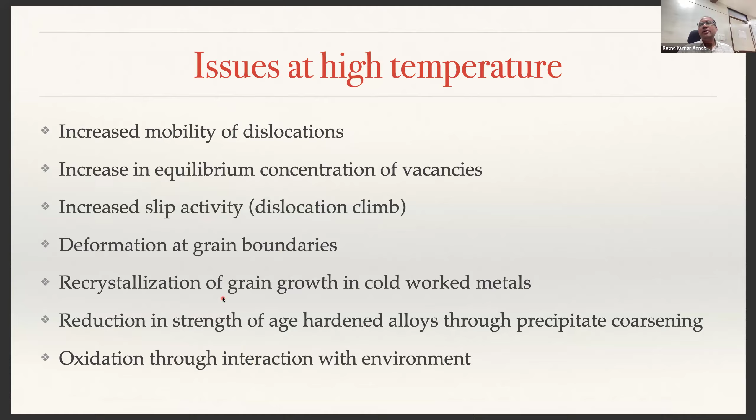And oxidation, because at high temperature, oxidation will be promoted much more easily. So these are all detrimental effects that you don't want in materials when they are operating at high temperature. That is the reason why you need to understand the behavior of these systems at high temperature.

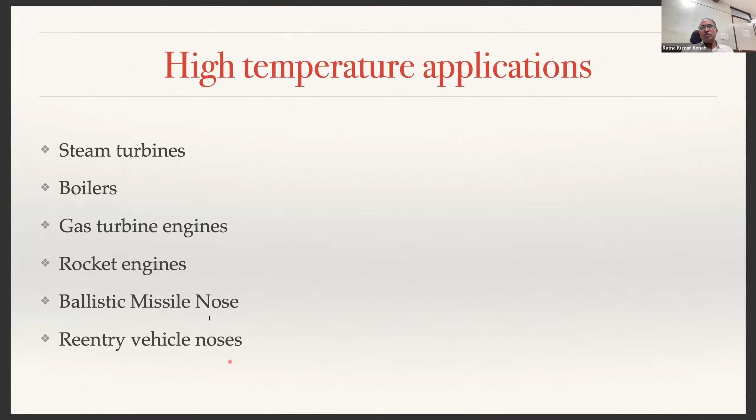There are various engineering applications where this high temperature phenomena is very important. Steam turbines operate at close to 500 degrees Celsius and so on, and hence you need to be very careful with the design of the turbine components. Boilers, gas turbine engines, rocket engines, ballistic missile noses, which are usually subjected to very high temperature, re-entry vehicle noses, which are also subjected to very high temperature.

So usually the high temperature strength. When you measure the strength of a material, when you mention this is the ultimate tensile strength of the material, we do not talk about temperature. Usually that is mentioned at room temperature. But when you increase the temperature and do the test, the ultimate tensile strength will be lower, it will be reduced. So the high temperature strength of materials is usually assessed with respect to a time scale.

What do I mean by that? I will tell you in a couple of slides from now. The tensile properties, if you measure at room temperature, are independent of time, but high temperature strength will be a function of time. That means at that particular strain, if you are operating for a sufficiently long time, the load at which it can withstand at that particular strain will come down. So that is very important. That is what we call relaxation of the material.

Again, at high temperatures, the strength of the material depends on the strain rate and time of exposure. The material strength depends on the rate at which you are loading more severely. And because we are dealing with metals, they exhibit elastic property normally at room temperature, but at high temperatures, several metals exhibit viscoelastic response, very similar to polymers.

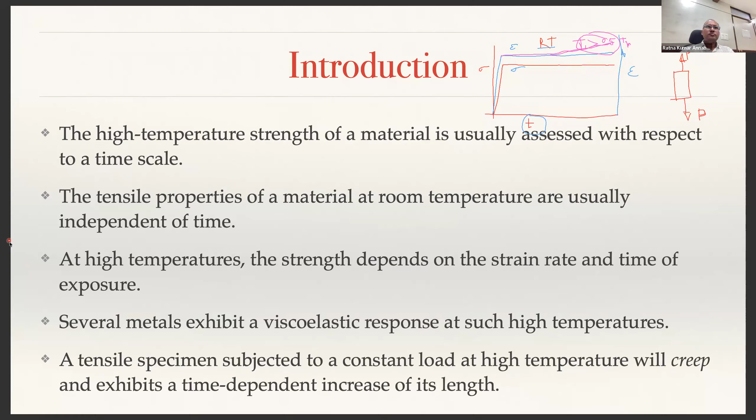Sir, one small question. If you remove the load, then what happens? Will it come back? I will talk about it in a moment.

So I said when it is working at high temperature, this happens. At room temperature, the strain will not increase, but at high temperature, the system continues to deform.

But what do you mean by high temperature? How do we define this high temperature? Is it 100 degrees Celsius, 200, 300 degrees Celsius? What is this temperature? Because a high temperature for one material may not be sufficiently high for another material. So how do we define this high temperature? A particular temperature can be considered high for one material, while for another it is not.

So a common measure is what we call homologous temperature, TH. Homologous temperature is the ratio of the test temperature to the melting temperature. That means if you are operating at T and the melting temperature is Tm, T by Tm is your homologous temperature.

Creep in a material is significant to be worried about if your homologous temperature is greater than 0.5. That means if your operating temperature is about 50% of the melting point of that particular material, that is when you need to worry about creep deformation. Otherwise, you need not worry.

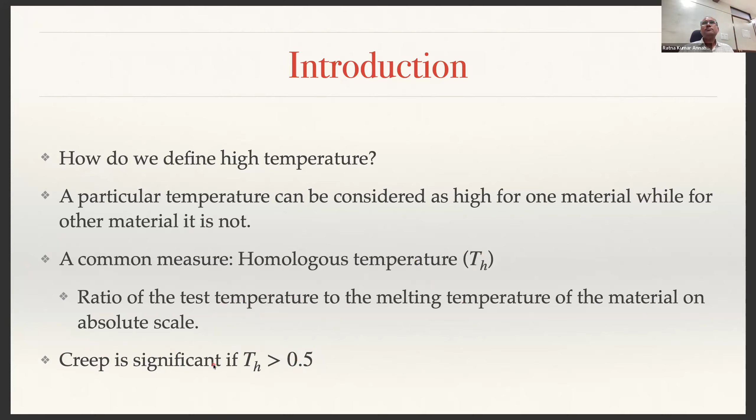Okay, now what kind of test do you need to do in order to see whether a material is good to be used under creep deformation or high temperature deformation? So the type of high temperature test that you want to use for a given material is usually determined by the time scale of its service for the said application.

For example, if you are designing a component for a rocket engine, we know for sure rocket engines are subjected to very high temperatures. Yes or no? Yes, sir. But then, do I need to design the component for creep? Just because it is subjected to very high temperature, do I need to design it for creep?

What about gas turbine engines, is it creep? Based on operating temperature only we have to decide. Based on operating temperature, is the operating temperature going to be very close to the melting temperature? It is going to be more than 0.5 times the melting temperature. Not the rocket engine, but gas turbine engines do go for thermal creep. The rocket engine need not be designed for creep, because the amount of time it operates at that high temperature is very short-lived.

So that is why the kind of test required to decide whether this component is suited for creep application depends on the time scales of its service. For example, you can simply do a high temperature tension test, measuring the ultimate strength of the material to see whether it is going to break or not.

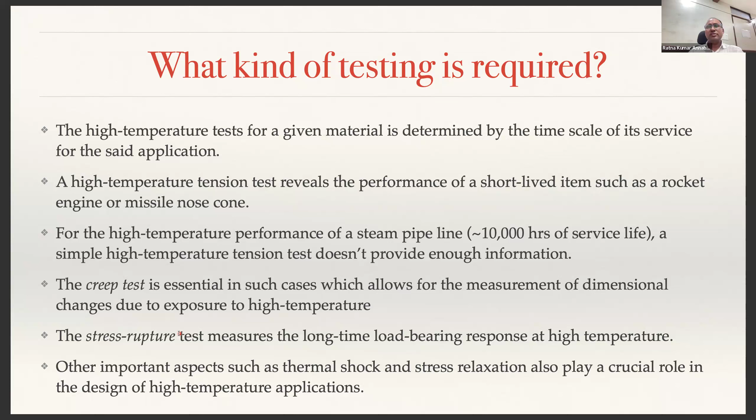There are also other aspects such as thermal shock and stress relaxation. They are also very important in high temperature applications.

This is a very interesting graph that gives us some understanding of creep deformation and how we do the test. Imagine you have a specimen subjected to a load sigma 1. At time t equal to 0, it is applied with a certain load, and at that load it deforms instantly. There is an instantaneous deformation of epsilon 1 at time t equal to 0.

You maintain that load without changing it. Because you are at high temperature, the material is going to deform, and hence strain develops. This is the instantaneous elastic deformation the material undergoes when the load is applied.

After that, you maintain the constant load, but because of the behavior called creep, the material keeps deforming. Thermal energy provided to the material enables dislocation motion, and as a result there is plastic deformation happening from epsilon 1 to epsilon 2. This is what we call anelastic deformation, occurring between T0 and T1.

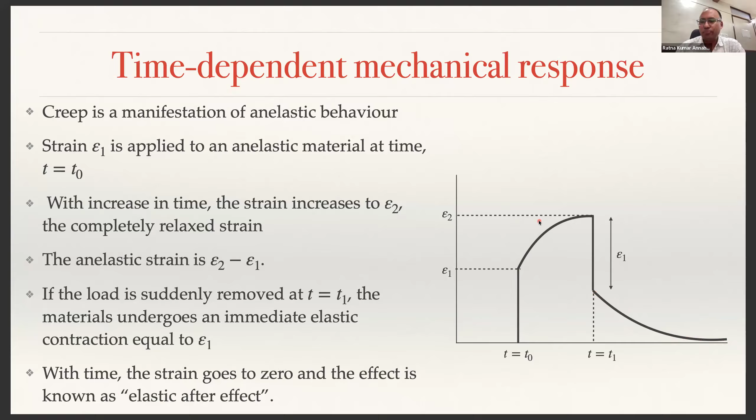Here we plot a curve called the creep curve, which is very similar to what we studied for crack length evolution.

Is this similar to the Paris law? Yes, you're right—similar in appearance to the Paris law, but it is not the Paris law.

Even in creep, you have three regimes: primary creep, secondary creep, and tertiary creep. Initially, when you apply a certain load, there is instantaneous elastic deformation defined by epsilon naught. After that, as you wait, creep strain develops. If you look at this region and take the slope of the line, it keeps changing.

After some time, you enter the secondary creep regime, where the strain rate remains constant—this is what we call the creep rate. Initially the creep rate is higher, then it slowly reduces and attains a steady value, which remains for quite some time; this is secondary creep. After that, you enter a regime where the creep rate starts increasing suddenly, and eventually the material fractures.

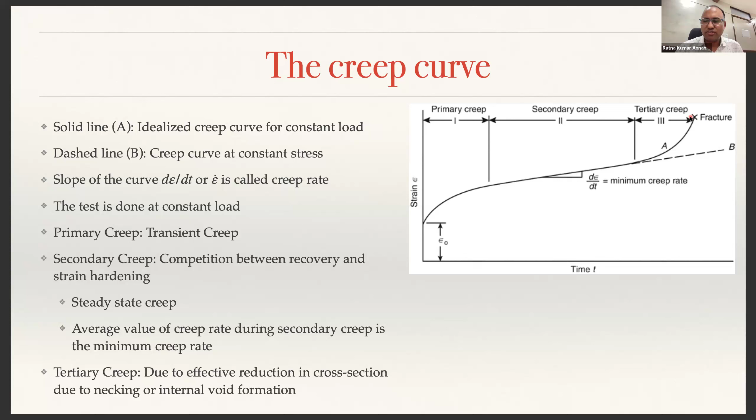One popular model for understanding creep failure is Andrade's model. This represents a constant stress creep curve, which is basically a superposition of two separate creep processes: an instantaneous initial rise, that is epsilon naught, followed by transient creep, or primary creep, with decreasing rate over time, and then a constant creep rate, which is called viscous creep.

All these things are embedded in this formula: epsilon naught e power kappa t. So epsilon naught is your initial elastic component, and based on that you define the initial primary creep, which is all transient, and then you have secondary creep. Beta and kappa are material constants depending on the material.

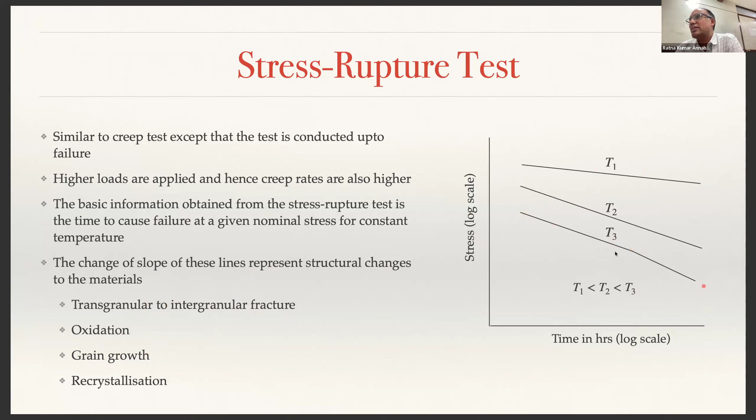The structural changes during creep can happen because of deformation by slip, subgrain formation, and grain boundary sliding. You can have slip, as discussed in plastic deformation, and you can also have subgrains forming within grains, and grain boundary sliding, because the grain boundaries become weak and may slide themselves. That is also one form of plastic deformation.

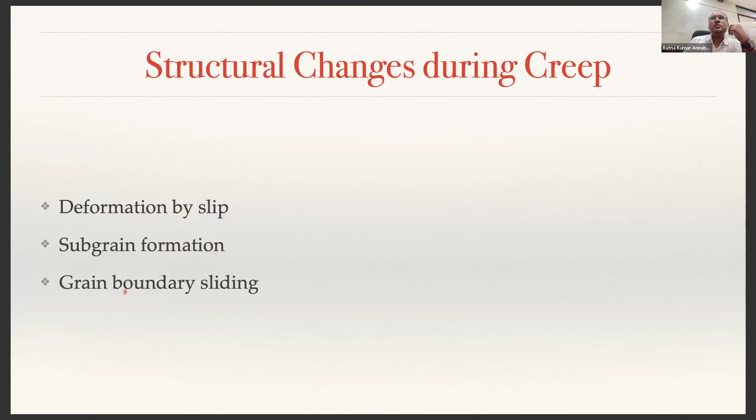This is how a typical creep testing machine looks like. Very simple, a fulcrum based test: you apply a constant load here, this is your specimen, and you put a strain gauge to measure the strain. For a constant load at a given temperature, you maintain this in a furnace so the entire specimen is at constant temperature. You will have instantaneous elastic plus plastic strain depending on the load applied, then primary creep, secondary creep, tertiary creep, and then rupture.

In the stress rupture test, we are measuring what is the time that it takes at a given load for the rupture to take place.

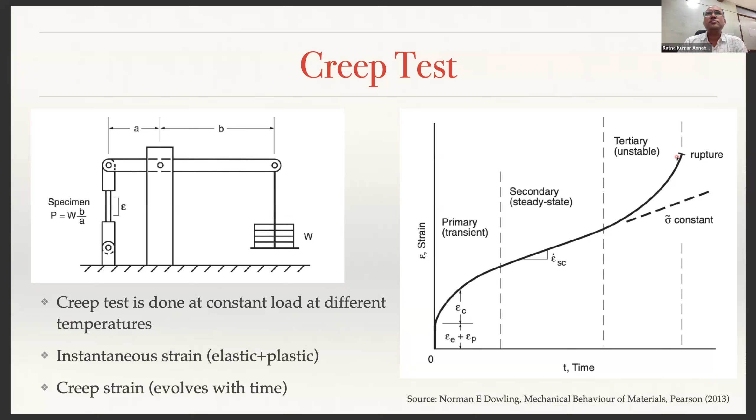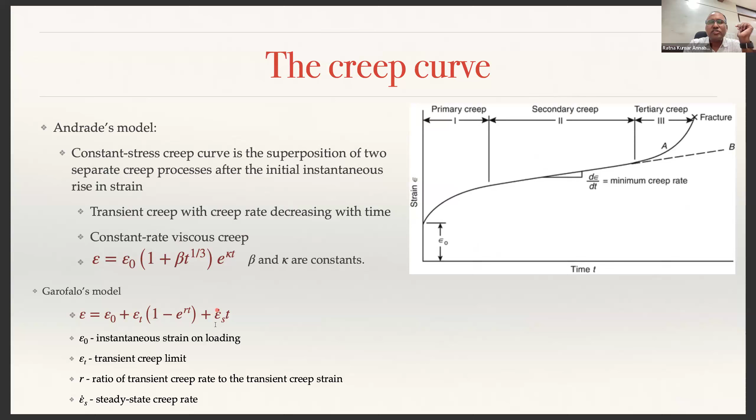The key data to be reported after a creep test is basically the stress sigma, temperature T, steady state creep strain epsilon SC dot, and time of rupture. These are the typical properties you need to put into the appropriate formula. For example, if you are using Garofalo's model, you need to know what is your epsilon S dot, which you measure from the creep test.

You can also get different plots to represent creep data. You have true stress versus true strain rate, SC dot, at a particular strain rate, which will be different for different temperatures. And here, sigma versus time to rupture: you can plot at a given stress and temperature what is the time to rupture. This is another way to represent the data. It's all one test, and you can represent several data from it.

So in fatigue, you write a stress versus stress-life diagram. In creep, you write a stress versus time-to-rupture diagram.

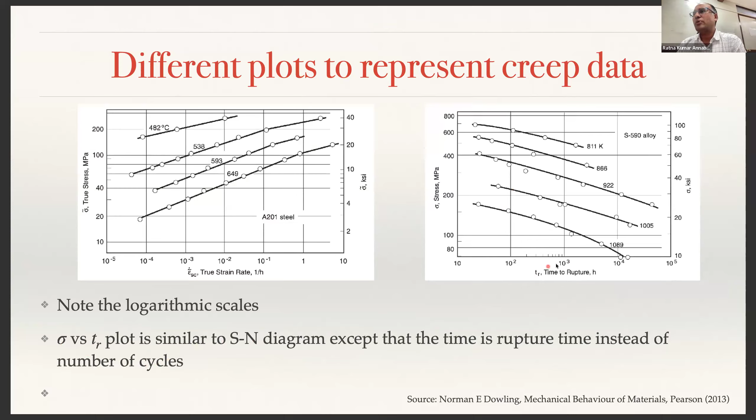This is typically how creep data looks like. As a function of homologous temperature, you can see up to 0.4 the effect of creep will not be significant, depending on the temperature and the load applied. Here you see tensile stress versus homologous temperature, showing the region of creep, with different mechanisms: transgranular creep fracture, intergranular creep fracture, and here it is rupture.

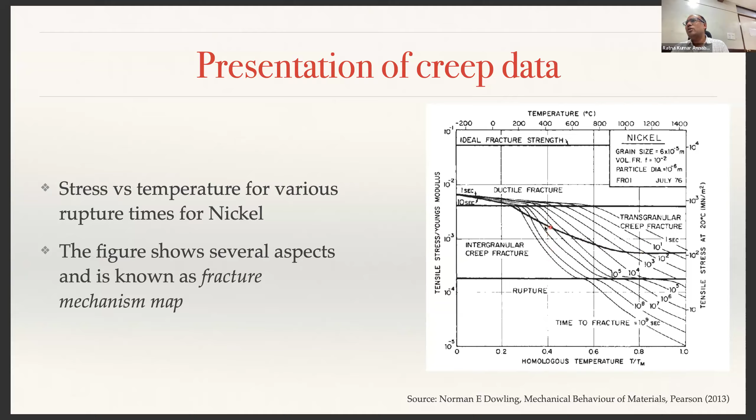This is typically what you would observe in creep data. Different fracture mechanisms: if you have a typical ductile fracture, say at T/Tm around 0.2, like room temperature, you will only see ductile fracture, you will not see this creep mechanism at all. The creep mechanism becomes more prominent below this line, typically at T/Tm close to 0.4 or so.

The creep data can be plotted as stress versus strain versus time for different sigma 1, sigma 2, sigma 3, and the same data can be represented in different ways. Stress-strain curves for various values of time—stress and strain at different time points—are called isochronous strain curves.

Using these isochronous stress-strain curves, we can measure the secant modulus, which is the slope at a given strain. For a given strain, you can draw a straight line, and the slope of that line is called ES, which can be plotted as a function of time. At a given time, the value of ES for different times will be given, and you can plot ES for that particular time, and so on.

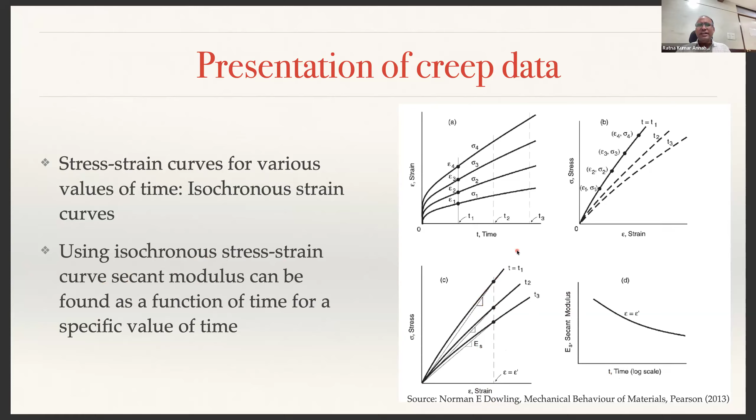As we have discussed, the physical mechanisms that cause creep will be different for different materials. It will not be the same. So in some materials, it could be transgranular creep fracture, and for some materials, it could be intergranular creep fracture. Intergranular means from one grain to another grain there will be a fracture. Transgranular means within the grain.

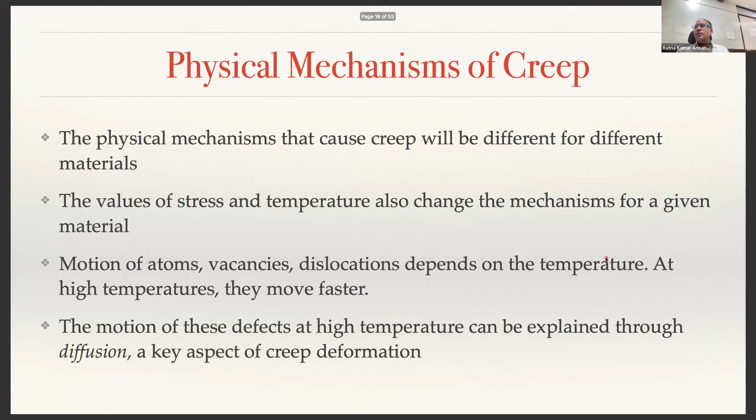Now, the strain rate we are talking about can be represented in this Arrhenius form, where Q is your activation energy, which we have actually measured here for each material. R is gas constant, T is the absolute temperature, and A depends on the stress that you are applying.

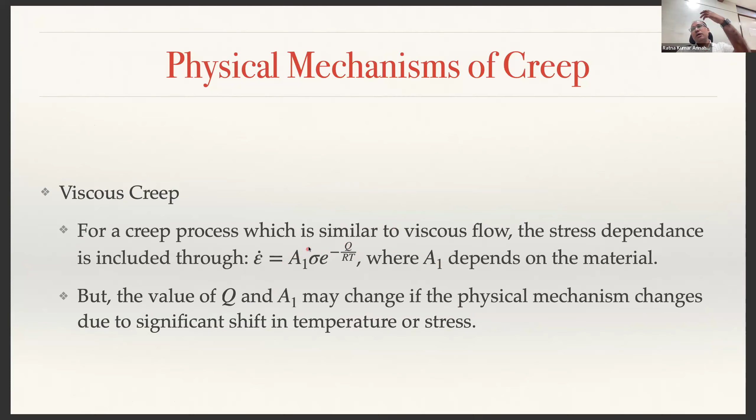So the viscous creep can now be represented by, because A is a constant that depends on the stress, we can bring out that stress explicitly and write epsilon dot is equal to A1, which is a material dependent constant, times stress, e power minus Q by RT, where Q and A1 are material constants. These will change depending upon the creep mechanism that is at play. So typically you will have different A1 and Q for a given material, depending upon the creep mechanism that is at play.

Similarly, we have heard of creep in polymers. It may actually happen at room temperature for several polymeric materials, because their homologous temperature equivalent will be very close to room temperature, and hence creep effects are usually observed. When we talk about polymers, we define this so-called high temperature as the glass transition temperature. For most materials, the glass transition temperature will be as low as -100 to as high as 200 degrees Celsius, which is why you can see creep even at room temperature for several materials.

For a crystalline polymer such as polyethylene, viscous flow occurs at temperatures well above Tg, the glass transition temperature. What happens when you operate above Tg? The van der Waals forces, the weak secondary bonds in the carbon-based molecular chains such as polyethylene, become weaker above the glass transition temperature, and that causes the permanent deformation.

This process can also be described by a similar Arrhenius type equation: epsilon dot is equal to A1 sigma e power minus Q by RT, where epsilon dot represents the strain rate as a function of time. The creep in polymers can also be represented by a rheological model - a spring and a dashpot eta 1, where the spring represents your elastic strain, the dashpot represents steady state creep, and the transient creep involves another elastic part as well as a dashpot.

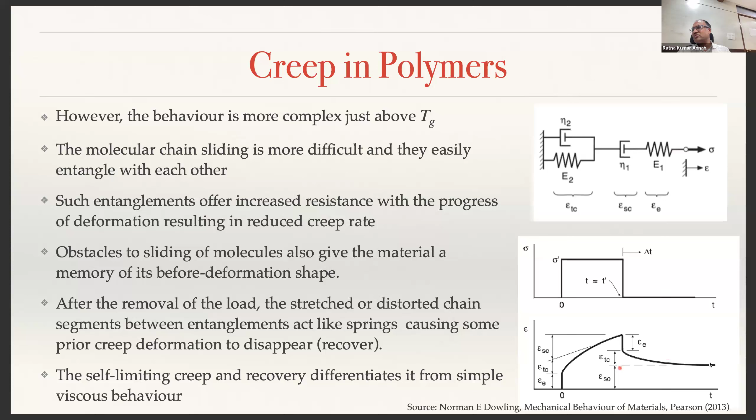In crystalline materials, like metals, you have three mechanisms: diffusional flow, dislocation creep, and grain boundary sliding. Depending upon whichever mechanism is at play, these constants will change. So the general equation for creep deformation in metals is given by this somewhat complicated equation.

Instead of earlier having only two constants, now you have A2, M, D, Q, and capital Q. These are all constants. I don't expect you to remember this formula, but understand that it is similar to imagining this term as A2 D power Q by T being another constant, A1 for instance. Sigma is your stress, D is your grain size, because creep deformation also depends on grain size - if your grain size is smaller, there are more grain boundaries, and hence grain boundary sliding is more active. A2, M, Q, and capital Q are all material dependent and depend on the particular creep mechanism at play - whether it is diffusional flow, dislocation creep, or grain boundary slide.

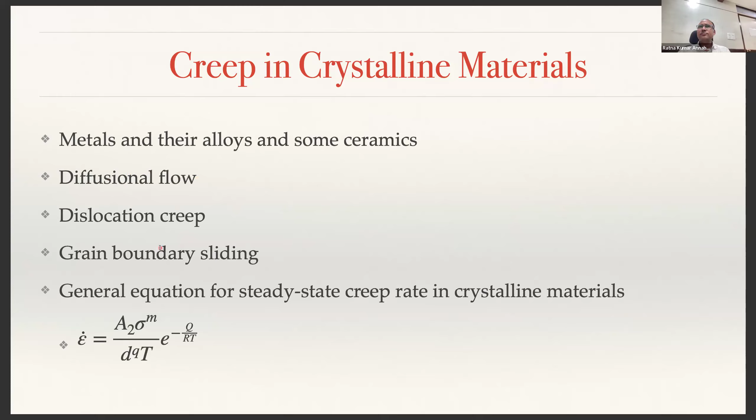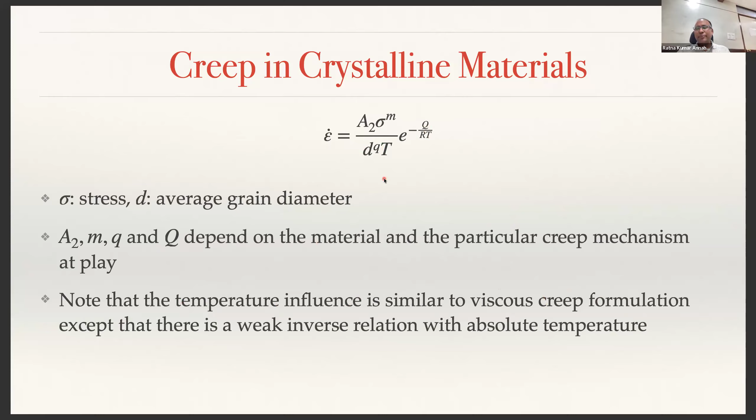The temperature influence is very similar to viscous creep formulation, because it is e power minus Q by RT, by 1 by T. The temperature effect is very similar to viscous creep, but otherwise it depends on the size of the grains and so on.

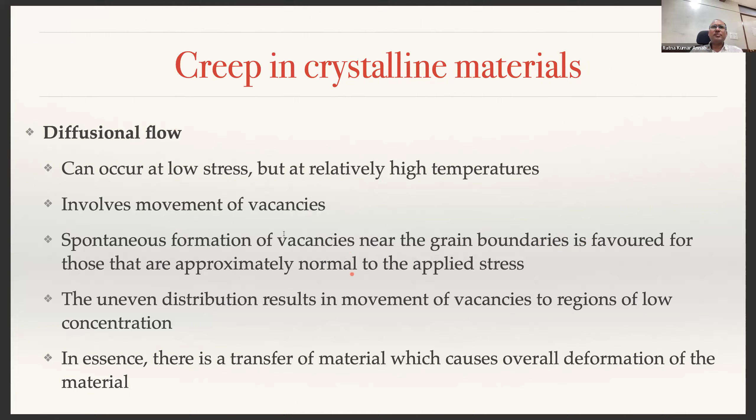As I said, there are three mechanisms. One is diffusional flow. This can take place at low stresses but very high temperatures, because at high temperature diffusion can take place - atomic motion can happen over long distances, creating vacancies in a material. They create spontaneous vacancy formation near grain boundaries, and even at lower stress that will cause some deformation.

The diffusional creep is also represented by something called Nabarro-Herring creep in literature, named after Nabarro, a material scientist from South Africa, who contributed significantly to understanding plastic deformation of materials. This equation represents the Nabarro-Herring creep, where the vacancies move through the crystal lattice.

The strain rate in this case is proportional to stress, M is equal to 1, and inversely proportional to the square of the average grain diameter. That means in Nabarro-Herring creep, M is equal to 1, Q is equal to 2. There is another creep mechanism called Coble creep mechanism, where M is equal to 1, Q equal to 3. I'm not going into the details of when Nabarro-Herring creep is more dominant or Coble creep is more dominant, but if you know the mechanism is better described by Coble creep, then you take Q equal to 3.

The activation energy Q is very similar to the activation energy for vacancy formation in the crystal lattice, or QB for diffusion along the grain boundaries.

The other mechanism is dislocation creep, also called power law creep. At very high temperature, you will have drastic motion of dislocations because of the additional energy provided by the high temperature. This can happen at very high stresses but intermediate temperature, where diffusional flow is small. So when diffusion is very low, dislocation creep can still take place if your load is very high, even though temperatures are small.

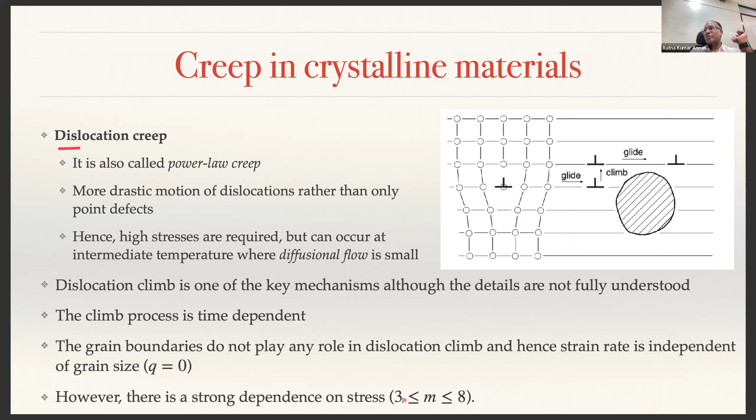Because it depends on the stress, it is not necessarily proportional to stress, but to stress to the power 3 or 4 or whatever.

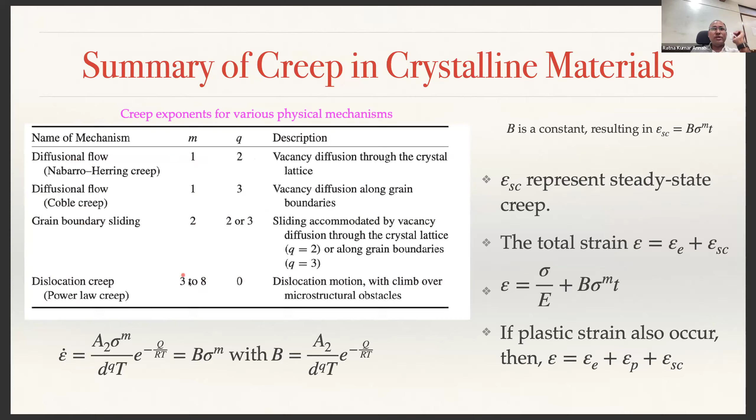So in summary, depending upon the mechanism: if it is diffusional creep, M equals 1, Q equals 2. If it is Coble creep, M equals 1, Q equals 3. In grain boundary sliding, it is 2 and 3. If it is dislocation creep, Q will not play any role, but M will have a large range of values, 3 to 8.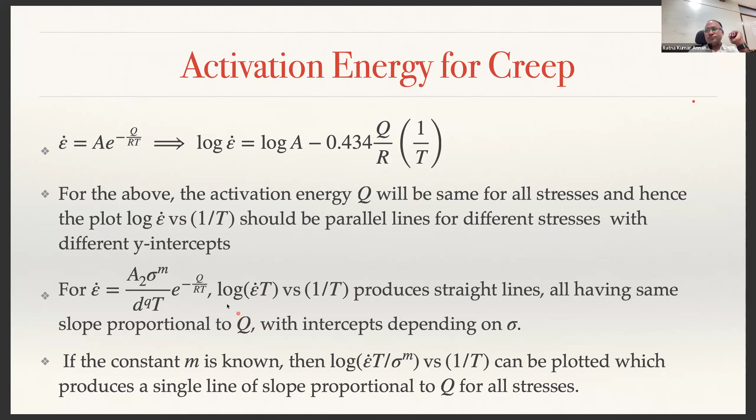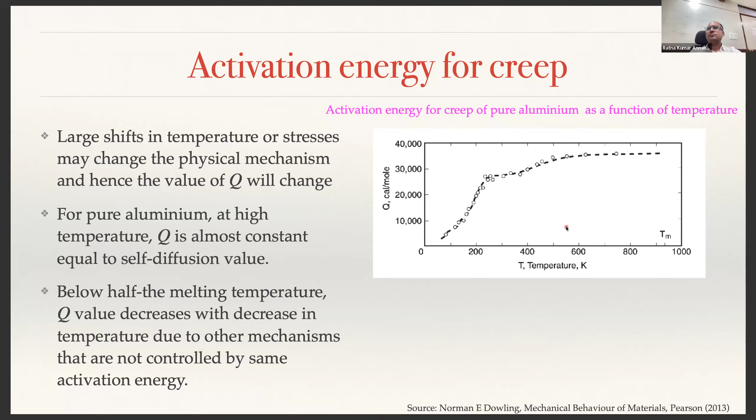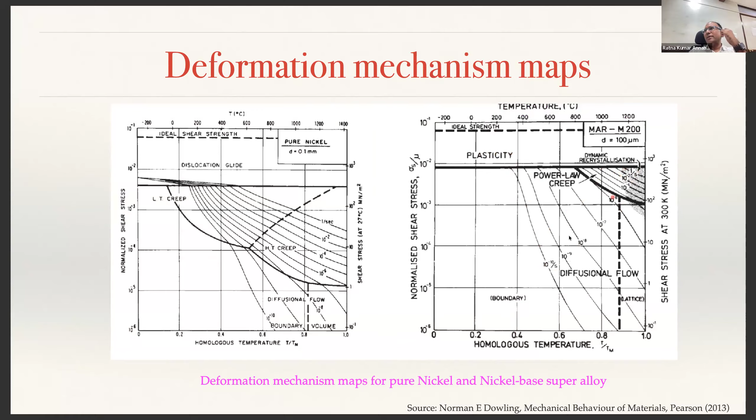Again, as shown earlier, you have pure plastic deformation if the homologous temperature is less than 0.4, only plasticity takes place. As the homologous temperature increases, depending upon the stress value or strain rate you are operating at, different mechanisms take place. This is the power law creep domain, this is diffusional flow, and there's nothing here.

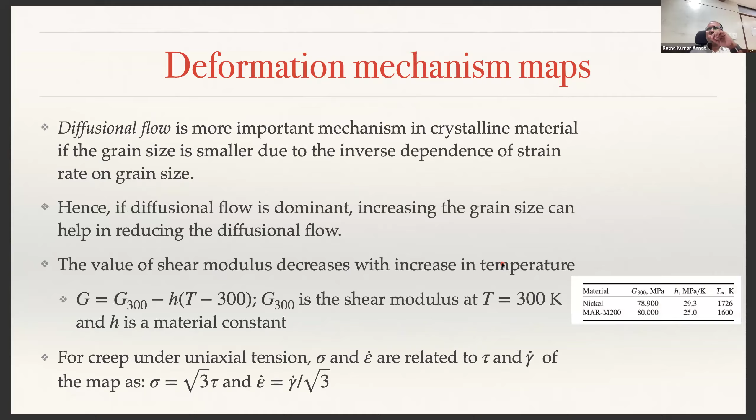This is the same mechanism. So if you take a nickel specimen with a deformation mechanism map as shown in this figure, if it is subjected to a stress of 6 MPa at a temperature of 900 degrees Celsius, meaning you need to know the melting temperature of nickel, let us say according to 900 degrees Celsius the homologous temperature is about 0.6.

It is subjected to a stress of 6 MPa, so you need to compute the corresponding normalized shear stress, this is shear stress at room temperature. You can measure the shear stress at 6 MPa, and corresponding to that, look at the homologous temperature, which gives you the shear strain rate. For example, if you are at 0.6, let's say this is your stress, then you can see the strain rate, and this is high temperature creep, this is low temperature creep regime, this is diffusional flow. You will be able to compute the strain rate for that particular scenario.

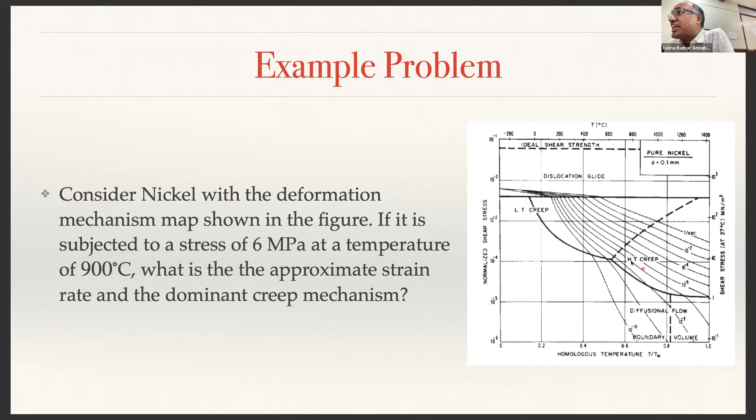So now, how do you estimate life? The time-temperature parameters and life estimates. Suppose you have a creep problem, creep deformation eventually leads to rupture in the material, meaning the breakage or breaking of the material.

Typically in crystalline materials like metals, you may have voids. Voids generation appears along the grain boundaries, small voids appear along grain boundaries and precipitates, and this is what we call cavitation. That might eventually lead to failure of the entire component, and when these voids coalesce and form a larger crack, that is what we call final fracture or creep rupture.

In ductile materials at very high temperature, you will have other mechanisms called dynamic recrystallization, because there will be diffusion of the material at very high temperature. Then there will be recrystallization of the material, and you will have large deformation without rupture because of the voids getting repaired and so on.

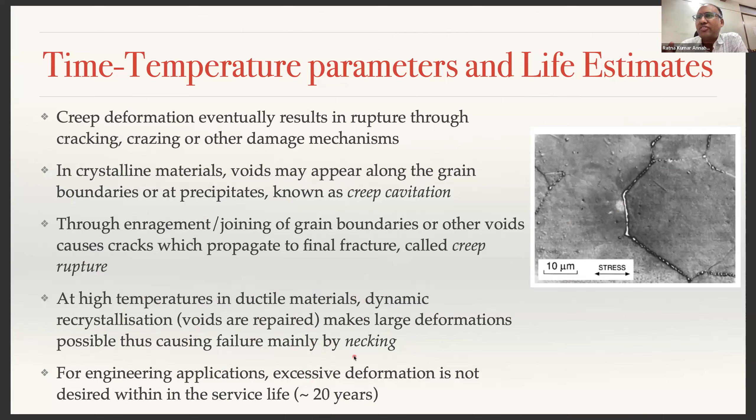But in engineering applications, if you are operating a component for about 10 or 20 years, you don't want excessive deformation. Hence you need to know what is the time for which you can operate this component at such high temperatures.

It is very difficult for us to generate data for such long periods of time. Let us say you want to identify what happens after 20 years. You cannot do an experiment for 20 years. So usually creep test data is available mostly for 1000 hours.

100,000 hours is about 11 years. Most of the creep data is available for 42 days. One creep experiment will minimum take 42 days.

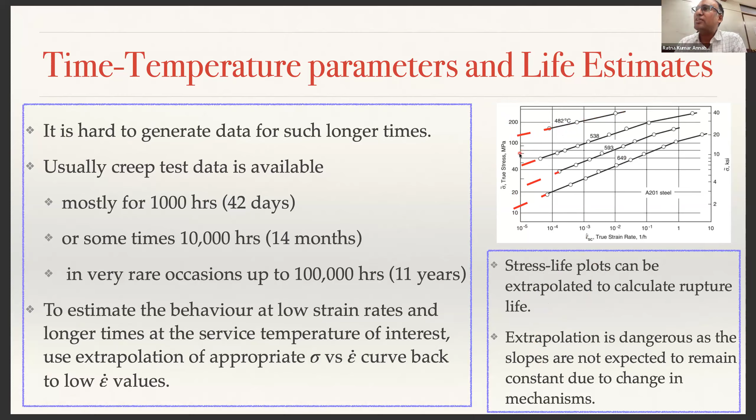If it is maintaining constant, it's not a problem. If it suddenly increases, then the stress at which you think it is failing is not going to be that. Suppose the slope reduces suddenly, then you will have trouble. Hence when you use the creep data, there will be a lot of uncertainty, like fatigue data.

So in order to avoid this extrapolation, people have suggested better approaches. You have to use data from relatively short time tests, but at temperatures much above the service temperature. So instead of, if your operation temperature is 100 degrees Celsius, you will still operate at a lower, shorter period of time, but at a higher temperature.

Why do we do that? Because the physical mechanism for the test and the service are more likely to be similar when you are operating at high temperature. So here we will use two parameters for life computation, called the Sherby-Dorn parameter and the Larson-Miller parameter, for the time-temperature approach.

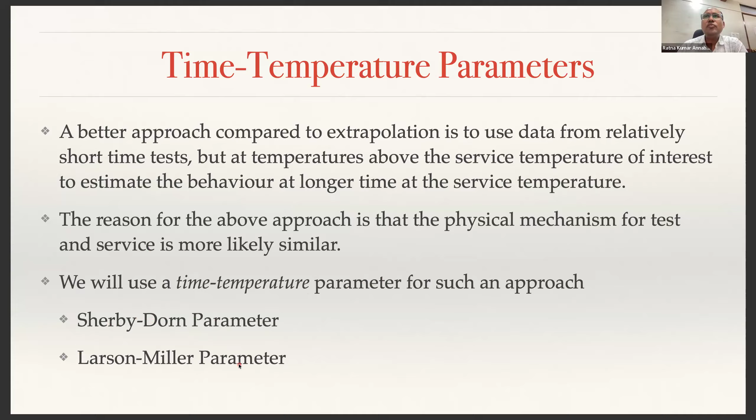So here you say this is the creep strain as a function of T to the power, this is time, e to the power minus 36,000 by RT, and time T is in hours.

You have epsilon dot equals A times sigma, e to the power minus Q by RT. Here the only assumption is that the activation energy is independent of anything, it is constant. If you take activation energy to be constant, you can write d epsilon equals A sigma, e to the power minus Q by RT, dt, because by integrating this you can do that.

And then the steady state creep rate, if you integrate that, you will get theta equals T, e to the power minus Q by RT. This is what we call temperature compensated time, and that is what we are plotting on the x-axis.

So for a given epsilon SC versus theta plot, you will get a unique curve for each material. You can see this is a unique curve for 99.987% aluminum. This is a unique curve for a different aluminum. This is a unique curve for a particular aluminum alloy.

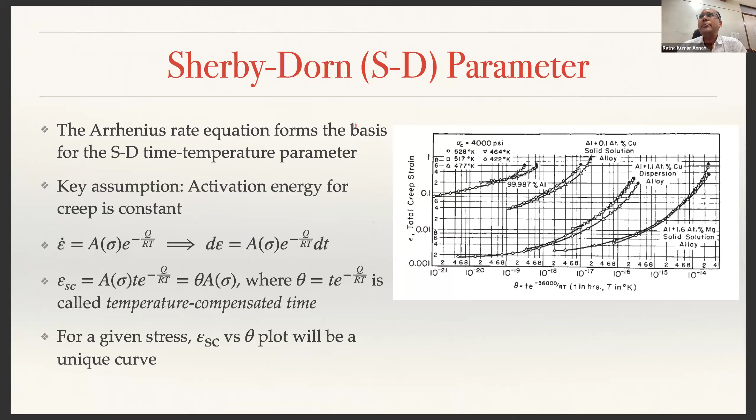And you can calculate the creep strain at rupture. The creep strain corresponding to rupture will be more or less constant for a given temperature, compensated time theta r. That is this fellow.

So theta r now depends only on stress. So for a single material, you should have a single curve relating theta r and stress. So you now define something called the SD parameter, the Sherby-Dorn parameter. PSD, logarithm of theta r, is given by log TR minus 0.217 Q by T.

So now if you plot log TR over 1 over T, this is y and 1 over T is your x. So M is 0.217 Q, that is the slope. And if you extrapolate that line, that will give you log TR, the rupture time. You can compute the rupture time, and that is how you can calculate the life available for a component.

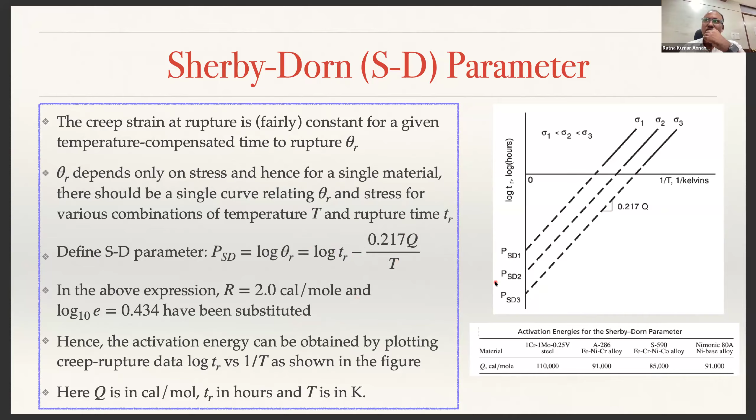Okay, so here you have an engineering component made of a certain material subjected in service to a static stress of 200 MPa at a temperature of 600 degrees Celsius. What creep rupture life in days is expected?

So this is for the same alloy, the creep rupture PSD curve. This is the Sherby-Dorn parameter curve for 200 MPa load. This value is minus 16, the Sherby-Dorn parameter. So PSD equals log TR minus 0.217 Q by T, given as minus 16. If you solve this equation, you get the rupture time as...

134,277 hours. That means this component can be operated at that particular temperature at a static stress of this value for 5,595 days.

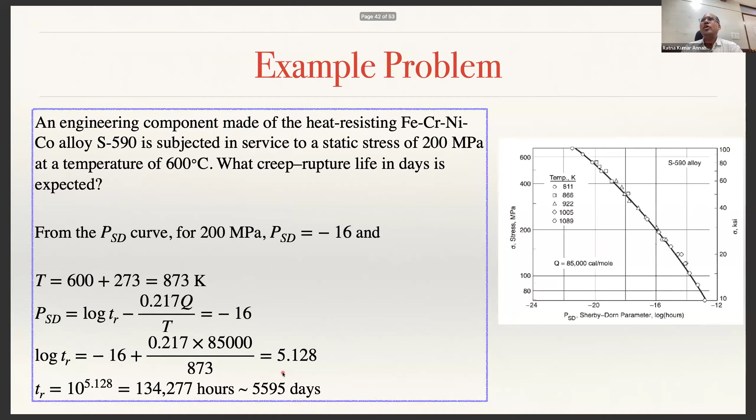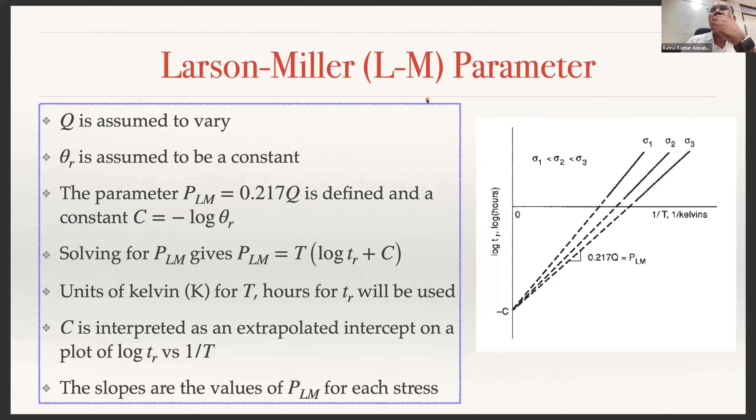Similarly, besides Sherby-Dorn, there is also another parameter called Larson-Miller. This is a very similar model, but a little different from the other one. You can follow this yourself; I'm not going to discuss it in detail, but if you go through the slides it should be clear how it is calculated.

Again, you can compute the life for the same material. If you are operating at 200 MPa at 600 degrees Celsius, again for S590 alloy, you see that it is 9,052 days. So different models give you different values, as we already know from other failure theories.

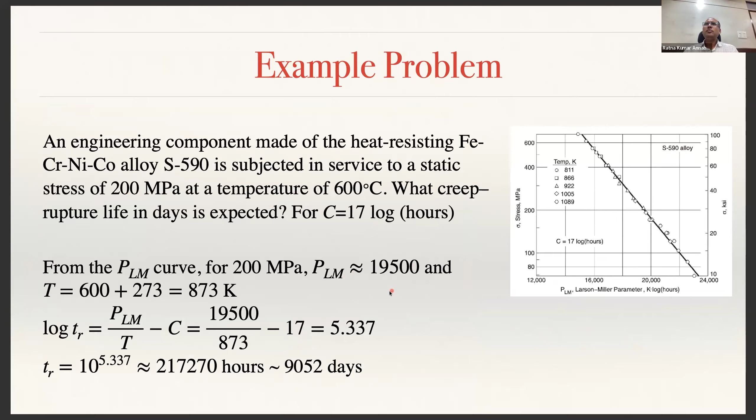So which one should I use, SD parameter or LM parameter? It depends on the type of scenario or the loading scenario that you have. Based on that, you should use one of the two.

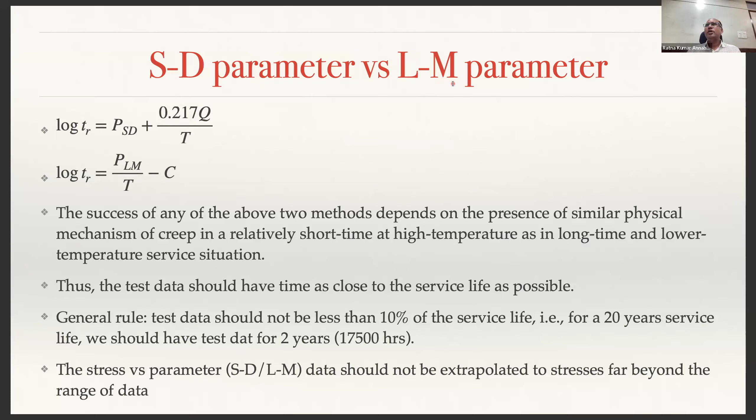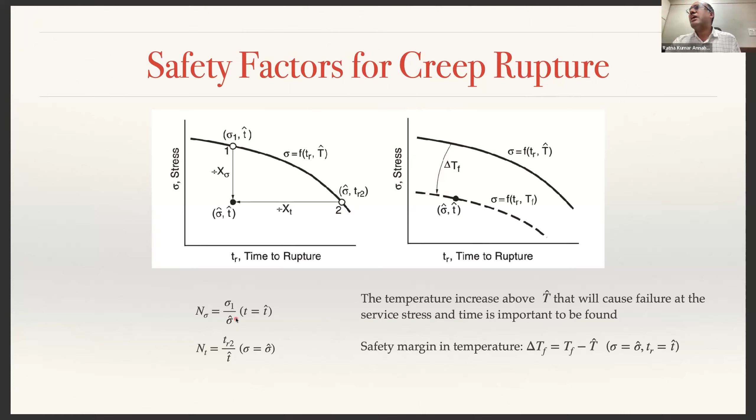One important aspect I want to stress here: all the time when we have talked about creep, we said the material is at constant temperature and constant load, and this temperature is above the homologous temperature. That is when creep deformation and all these things happen. But now imagine what would happen at a temperature higher than the homologous temperature.

We have maintained the load constant, but now what if you are cycling the stress also at a non-zero mean stress? Then you have creep plus fatigue.

That makes the life much more complicated, right? So creep fatigue is possibly one of the most complex things one can study, and to date we don't fully understand it because they are all non-linear processes. It is very difficult to develop models that can actually explain or predict failure with reasonable accuracy when both creep and fatigue are present.

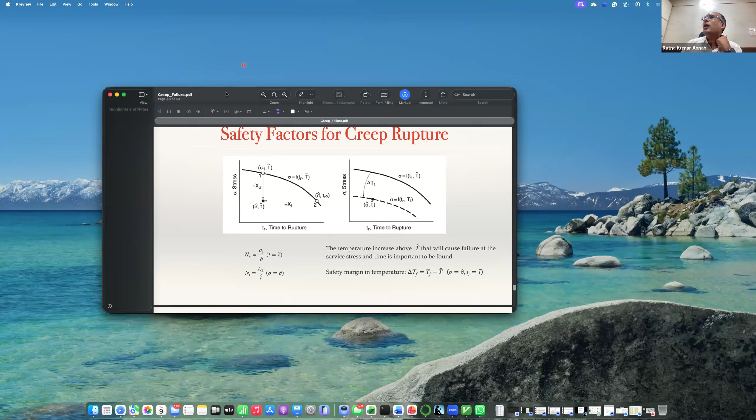Okay, I think with that I'll stop. There is nothing else to cover, so this is the last class of this course, and I wish you all the best for the final exam.

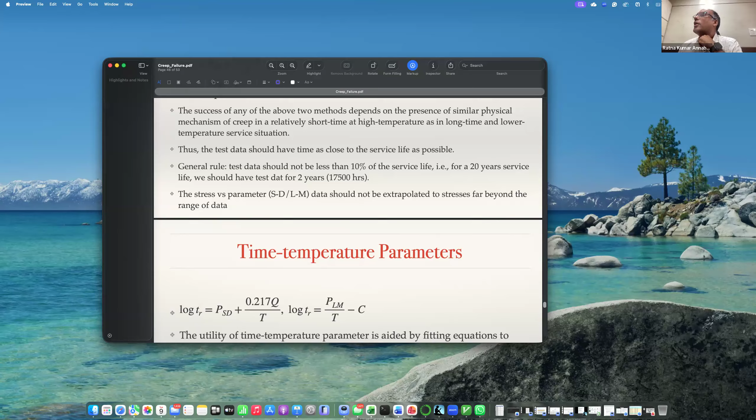Sir, the only thing is that we require some practice. If you could give us that, as I told you, I will give you the assignment on fatigue failure most likely by tomorrow. I was on it, but I somehow forgot to upload it. By tomorrow I will upload it. Right, sir.

Any other questions? Sir, for this creep, what kind of reinforcements can you make, like changing the material? Do you have to do some alloying which will reduce it? See, what we said is at high temperature the problem is there will be dislocation motion, right? So you should add some alloying or impediments to avoid the dislocation motion. You need to increase the homologous temperature of the material by adding an alloying element.

Any other questions? Yes, professor. For the final exam, will most of the portion covered after the midterm be prioritized, or how is it? For the final exam you will have static failure theories and fatigue failure theories, that's all.

Thank you. Okay, so I see that in the quiz and midterm some people have not been able to perform well, but please make sure you will be able to refresh your fundamentals and be able to write the final exam well. I hope you have learned something about failure in this class. Let's see how it turns out in the exam.